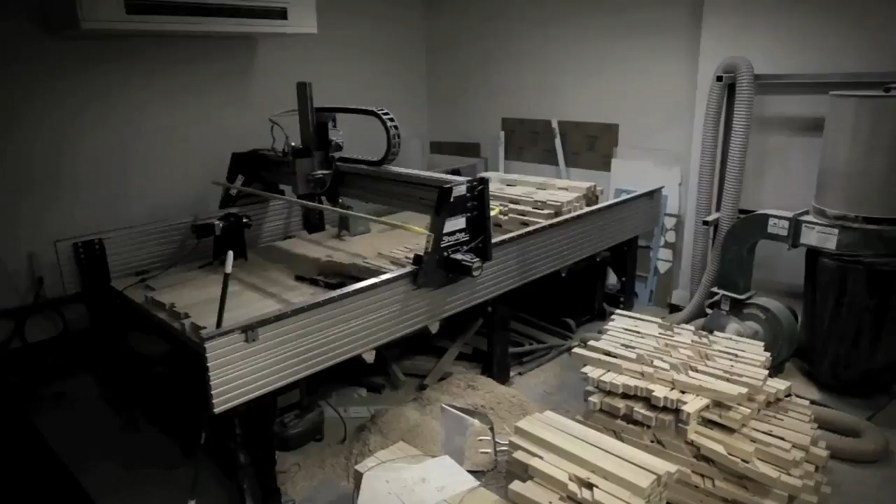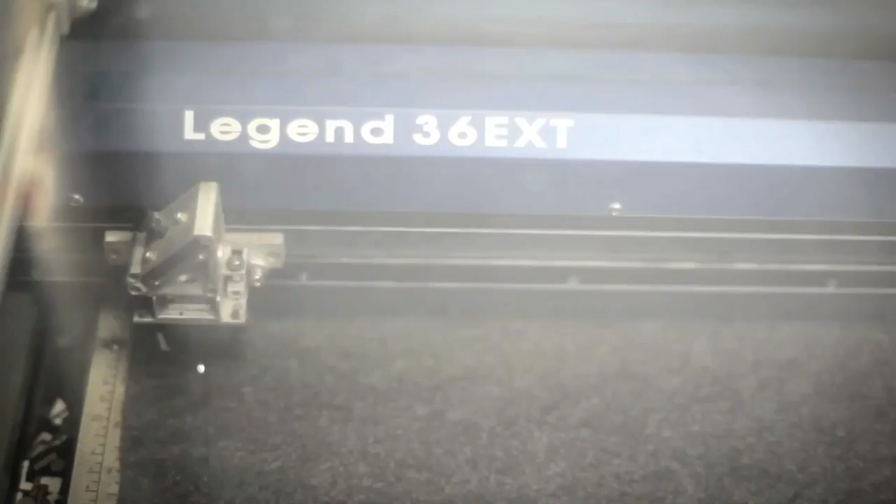Well, MIT is a very different kind of institute. Instead of becoming the recipients of building industry culture, we can now change building industry by the kinds of experiments we're doing in school. MIT has a variety of departments that are so powerful that they have the potential of radicalizing what we do in design and in the architecture department.

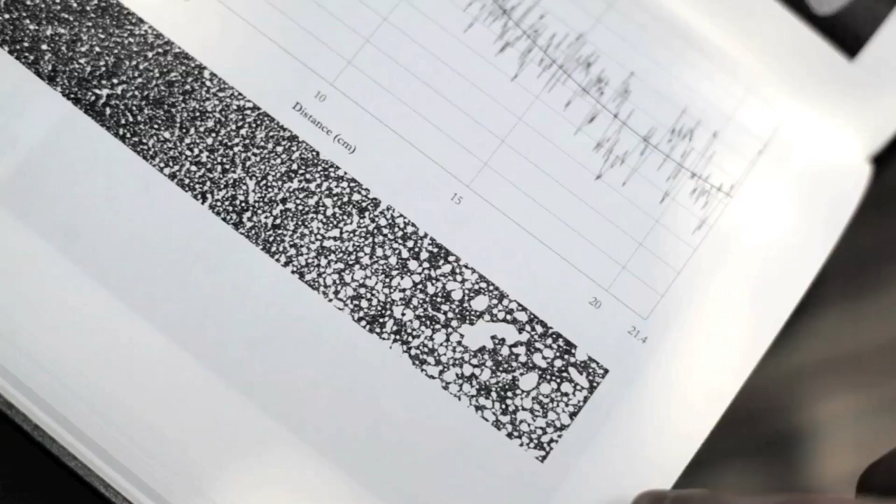Even the way that we've structured our curriculum around workshops and other kinds of collaborations in a way foster and encourage this kind of cross-disciplinary platform. So we're situated perfectly for the kinds of things that only MIT can do.

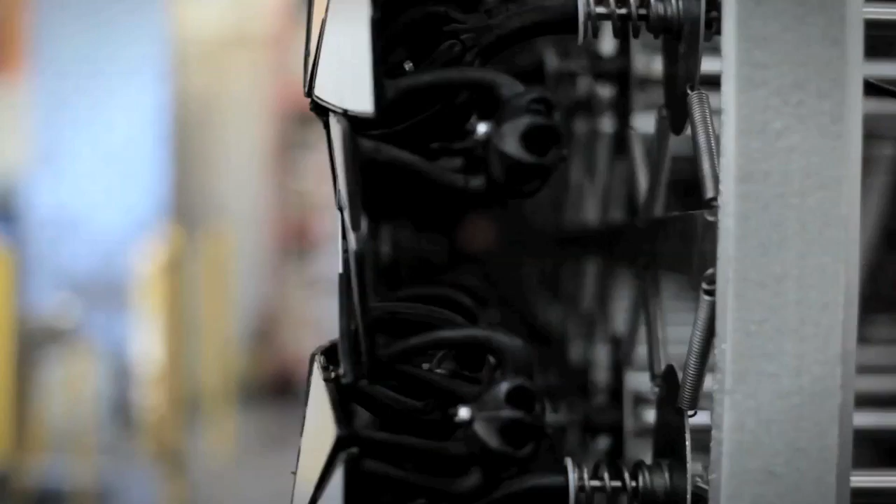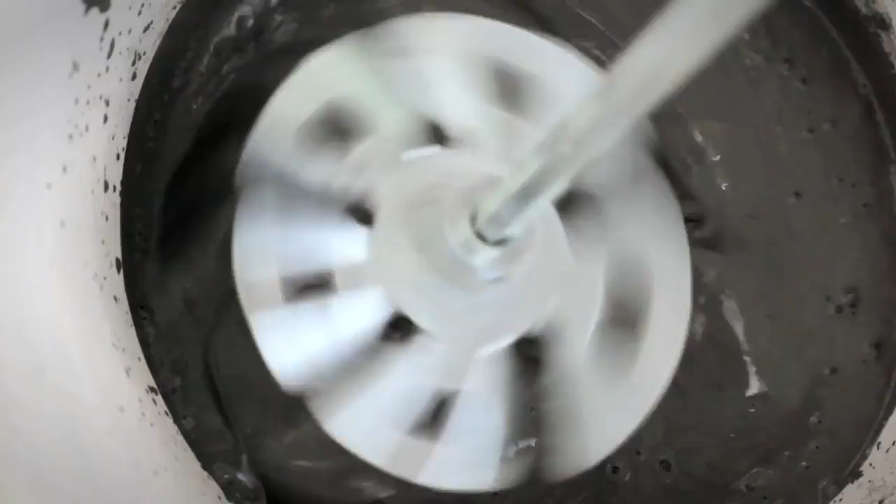The invention of human artifacts of any kind always consists of three elements: the geometry, the process, and the material that constitute that artifact. It's very clear that new materials engender new forms, and architectural design benefits from addressing, applying new materials in an informed way.

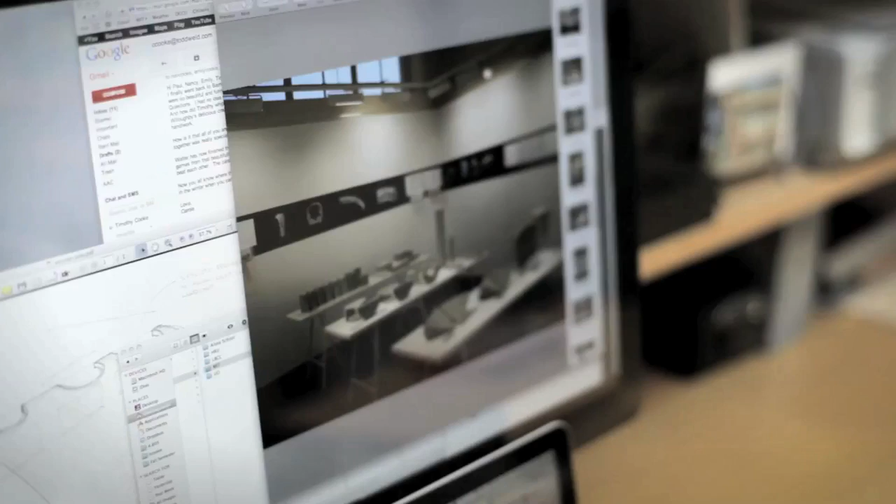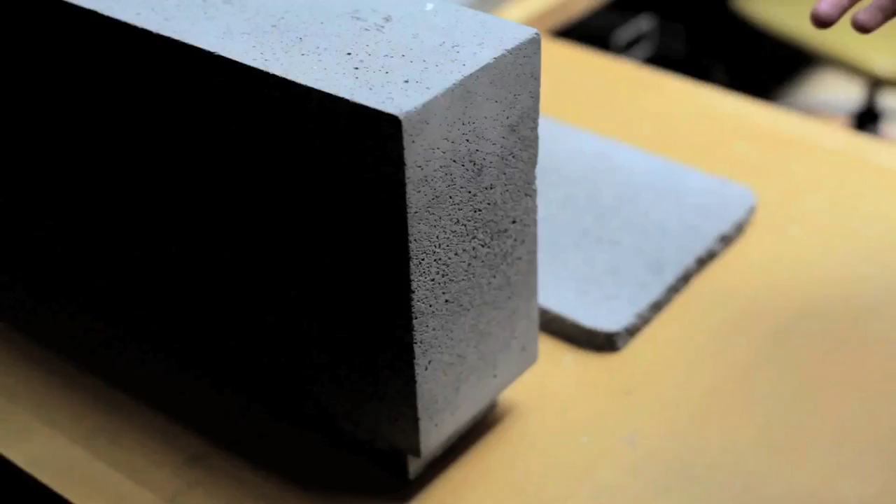The Emergent Materials Group and the Urban Metabolism Group share a central interest in materials for the built environment. Lately, we've been working a great deal in the area of foamed materials, especially foamed cements and concretes. So typically, beam in bending is going to have the greatest amount of stresses on the top and bottom, so we can reduce the amount of material on the interior of a beam.

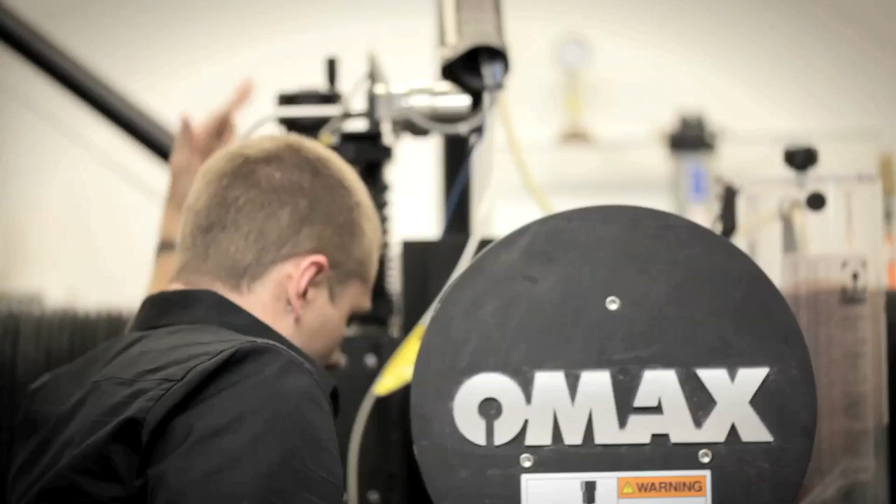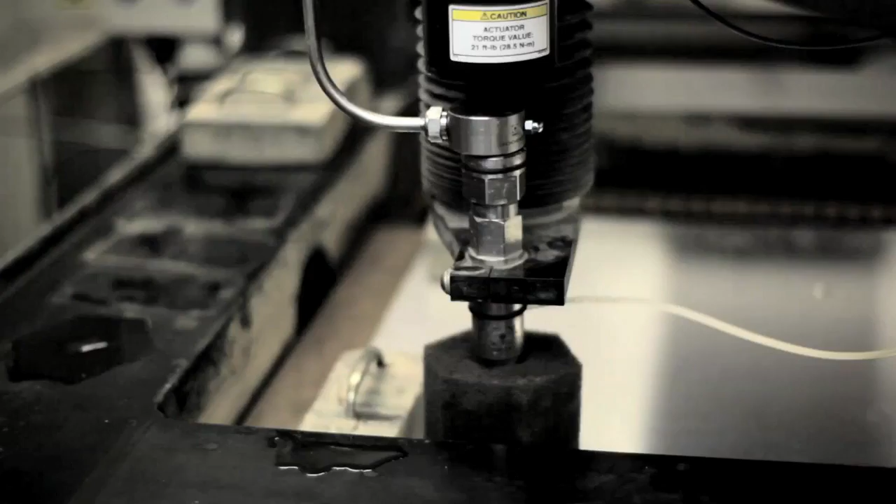The work really tries to address that there's two main paradigms throughout almost every industry. The one paradigm is what can you design, what can you compute or analyze, and the other paradigm is what can you physically construct or what can you build.

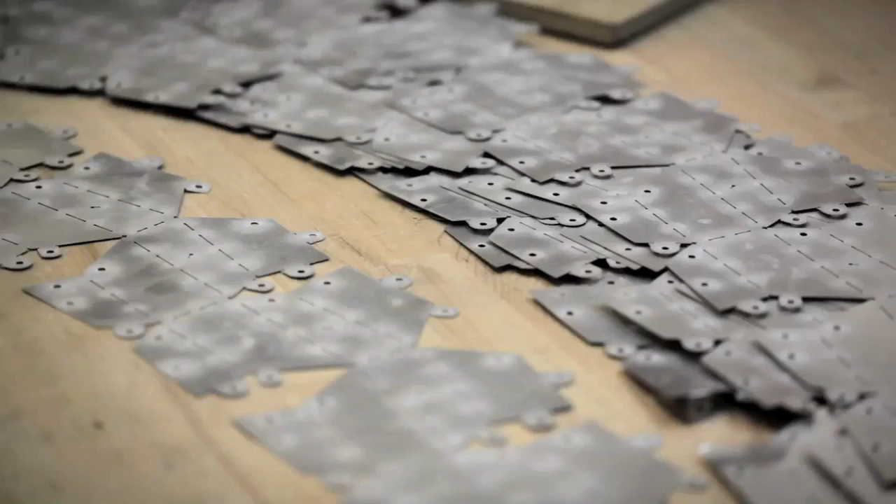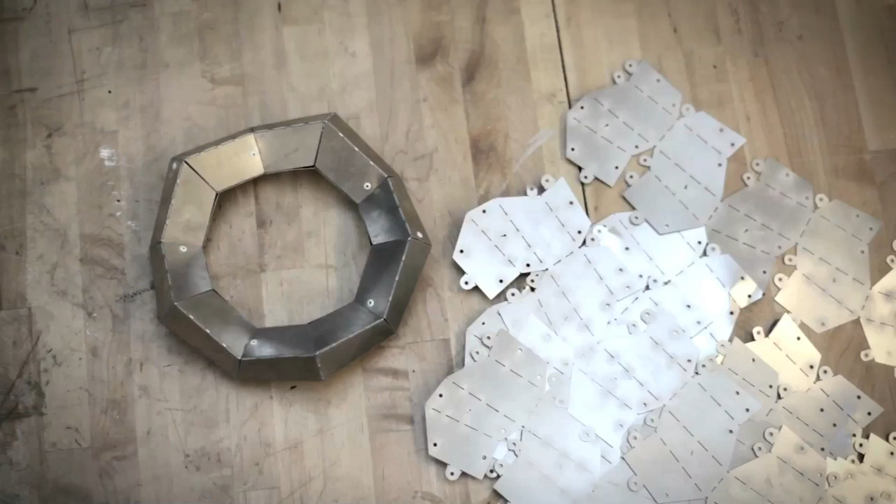The work really tries to traverse all scale lengths. It tries to work from the nanoscale, which is traditionally where we see self-assembly in biological examples, chemical examples, and it tries to bridge that and say, can't we use this phenomenon of self-assembly as a new paradigm for building things at large scale?

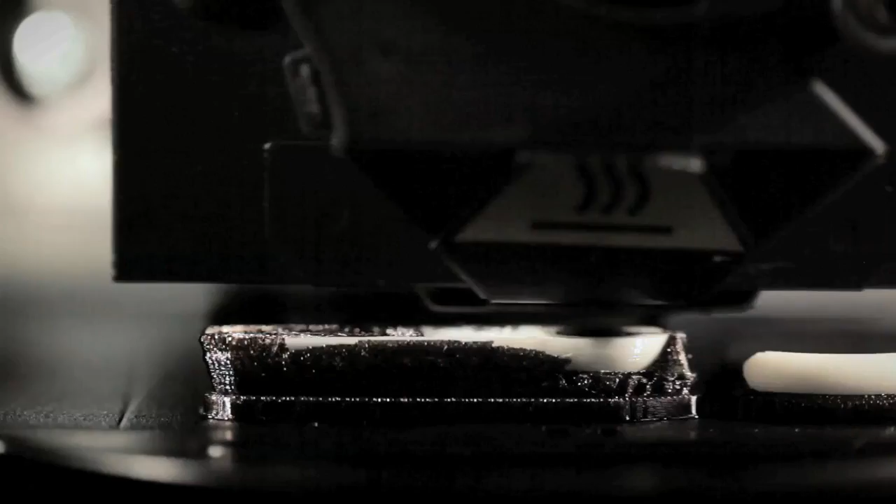We work with any type of material, synthetic or natural materials, and really try to design specific geometries that have materials in mind. And when you design those two together, they can respond to energy. And the energy sources can be heat, shaking, gravity, pneumatics, electronics. So you can use any type of energy. And when you mix that with the geometry and material properties, then they can respond and they can change state.

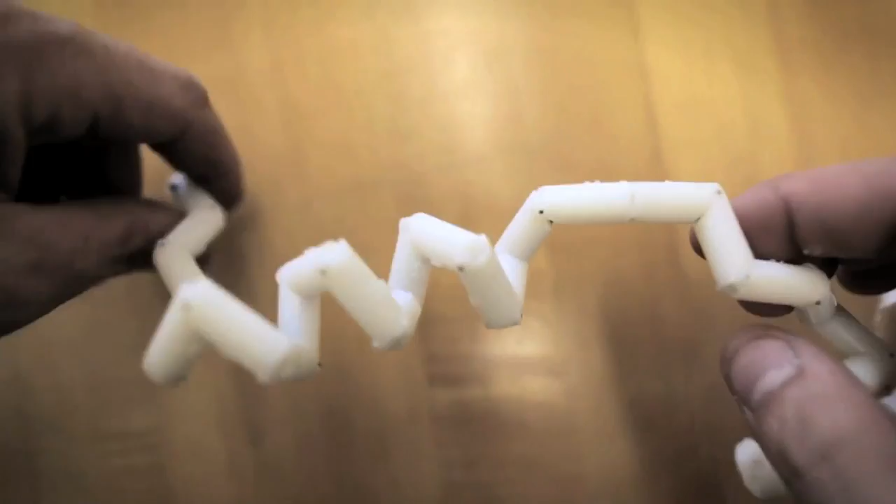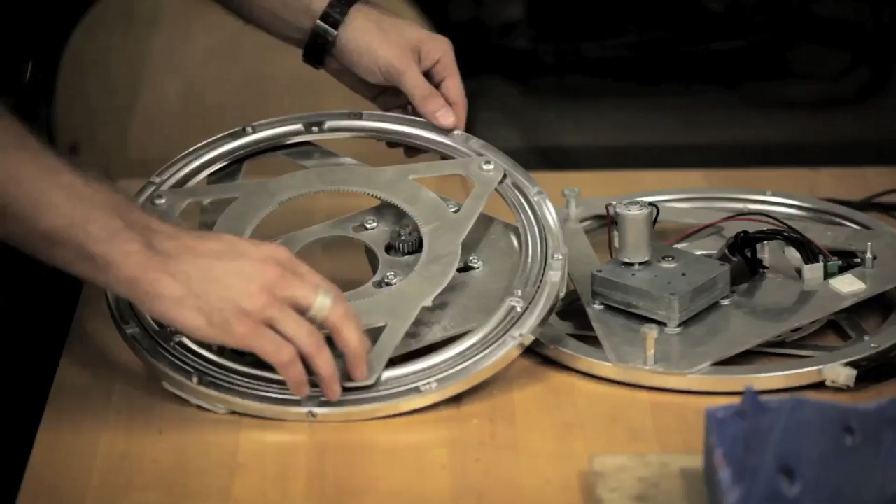Primarily, it will first be applied in extreme environments, scenarios where it's difficult to build. The research and the practice is really about cross-disciplinary collaborations between designers, scientists, engineers, working on this phenomenon of self-assembly, discovering where we find it naturally, where we can use it synthetically, and trying to apply that at all different scale lengths.

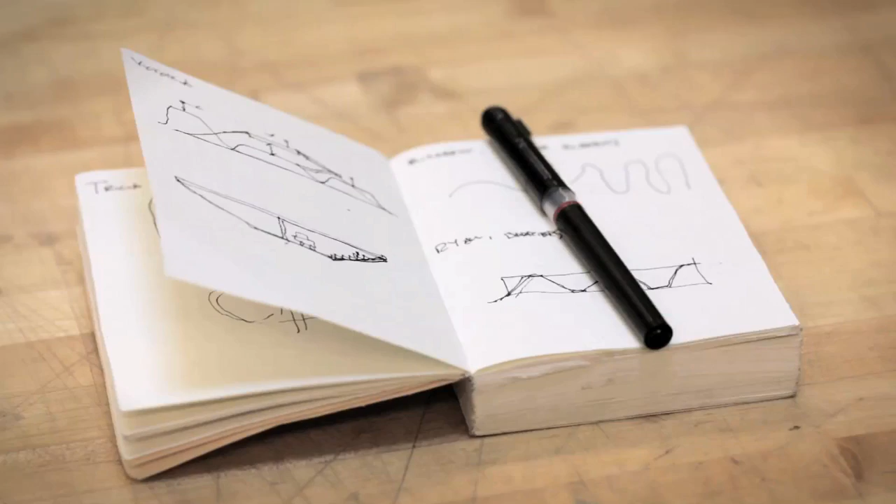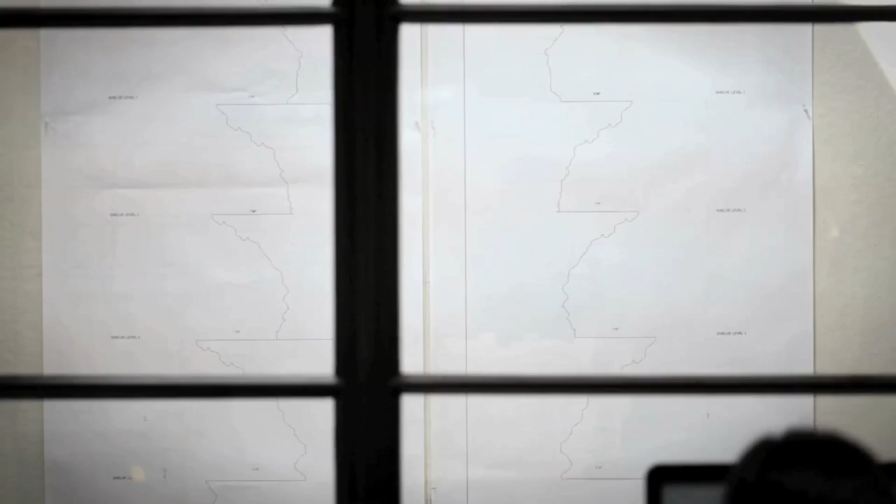The focus of our work, at least at this smaller scale, at the scale of, say, art installations or retail, we leverage CNC fabrication methods, but not as a way to exude their prowess necessarily, but more as a way to help us get at a particular formal agenda. An installation called Totems, which in a way is a kind of proto-architecture, not quite architectural, not quite sculptural, but I think that it offers a kind of proposition to each of those disciplines.

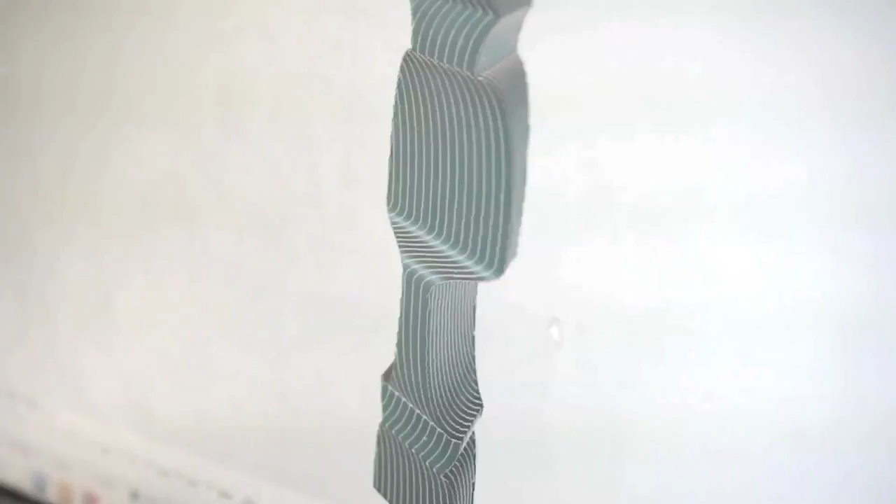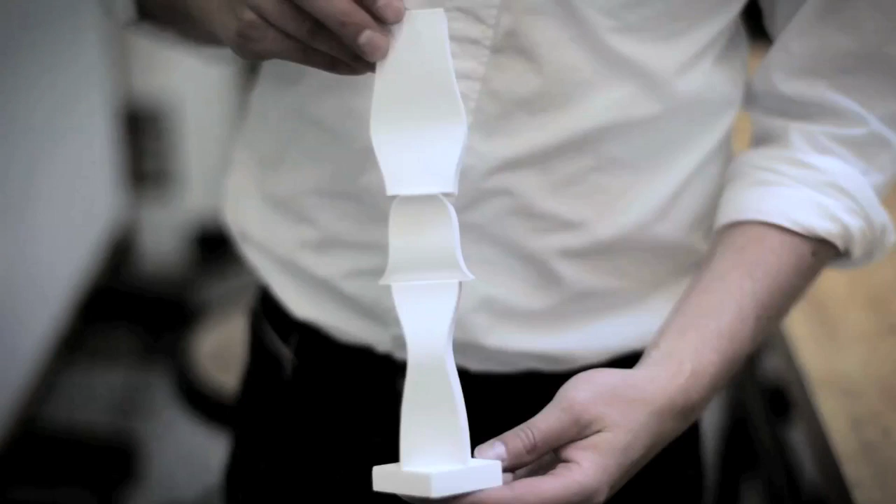We do a lot of testing via 3D prints. A lot of the formal investigations for Totems specifically happened in 3D prints. We did maybe 30 to 50 3D prints of the totems as a way to understand how the light and shadows were working and how best the anamorphic effects were working before we went to the large format wire cutter.

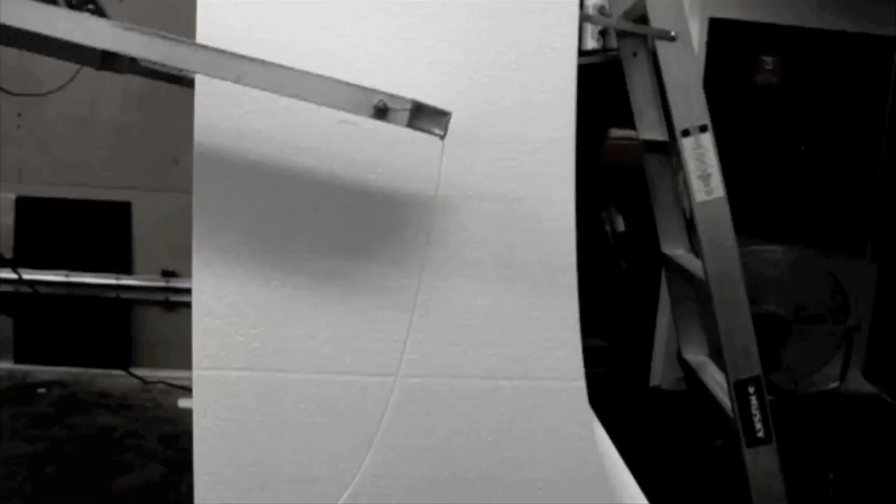In terms of collaborations, some of those happen here at MIT. Joel Lemire and I are developing an installation now, which is an anechoic chamber, and the anechoic chamber uses industrial felt both on its exterior and as a way to absorb sound on the interior. I'm bringing a kind of disciplinary or formal or geometric interest on the one hand, also a certain set of specialized understandings of the behavior of these sheet materials on the other.

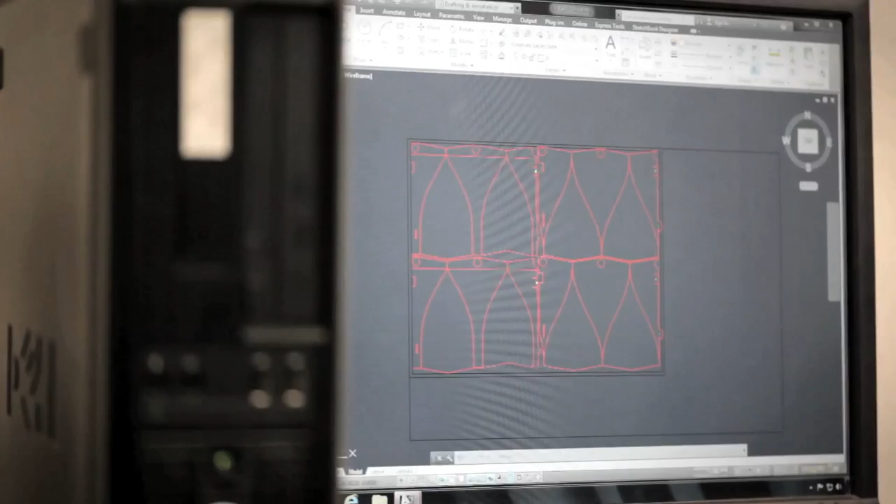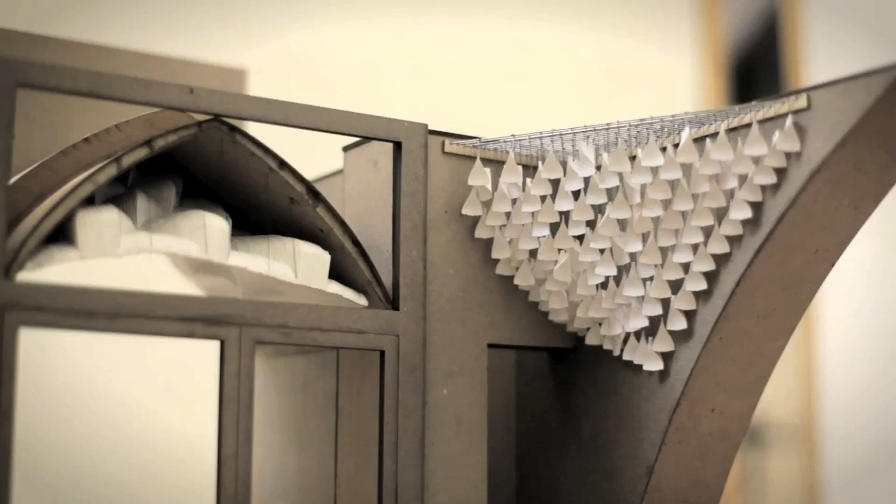So my architectural interests are really broad, but in terms of my current research preoccupation, it's about material geometry, specifically sheet shapes or sheet material geometries, how they bend, stretch, stack, fold. But obviously understanding sheet materials is really critical to architecture. It's a sort of a long-standing discourse on sheet materials in architecture, in part because it's so ubiquitous in conventional construction.

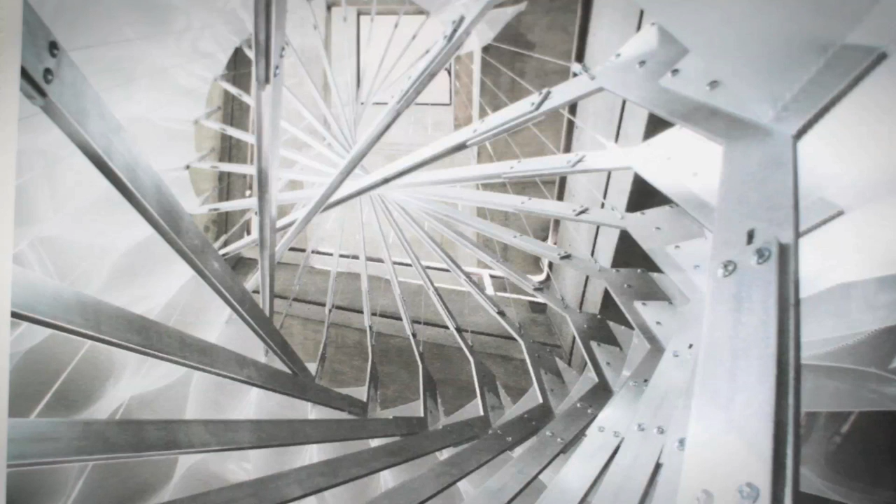So everything including plywood, sheet metal, steel, aluminum, plastics, all of these have to deal with the developable surface geometries, which is to say sheet shapes generally. And so expanding the total set of understandings about sheet shapes is a totally and kind of obviously worthwhile architectural undertaking. These installations attempt to jump from the scale of the paper model to the scale of the architectural space at the very least.

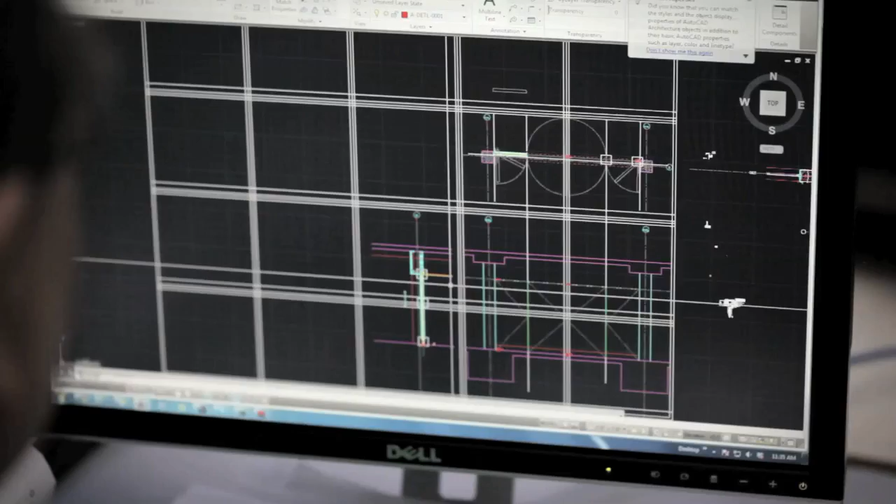Well, over the past 20 years, first as Office DA, now as NADAAA, we've identified 2 or 3 areas of focus. The first has been to look at materials and their behavior as a point of departure for many of the architectural experiments we do.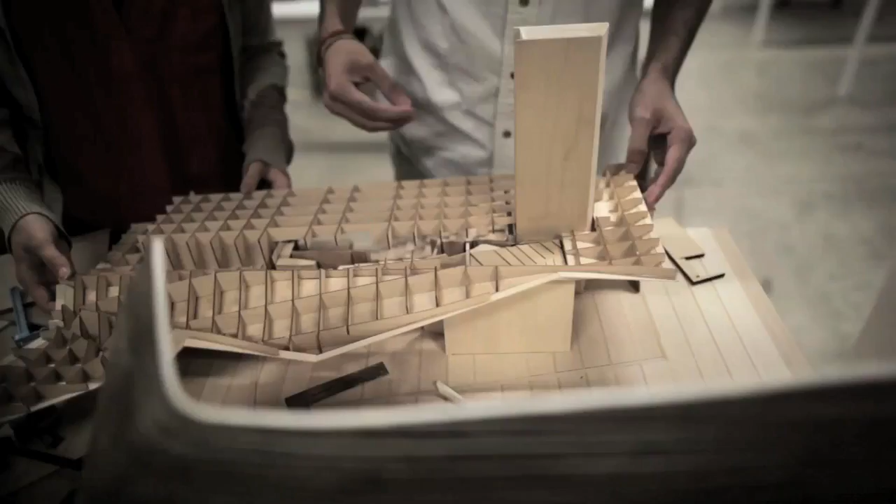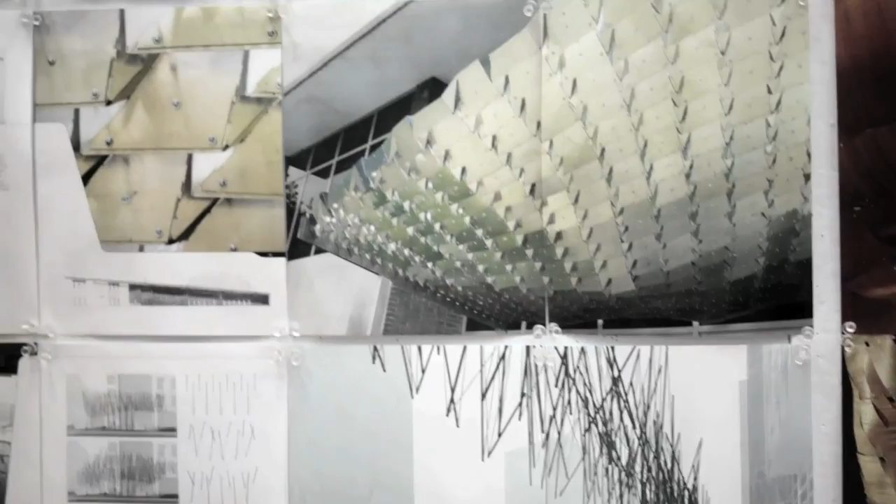The second area is to recognize that materials don't have an endless limit. Everything comes in modules, in sheets, in blocks, in bricks, and that without aggregation, there's no way of beginning to figure out how construction works in general. So the detail of bringing things together as a point of departure has been another central focus.

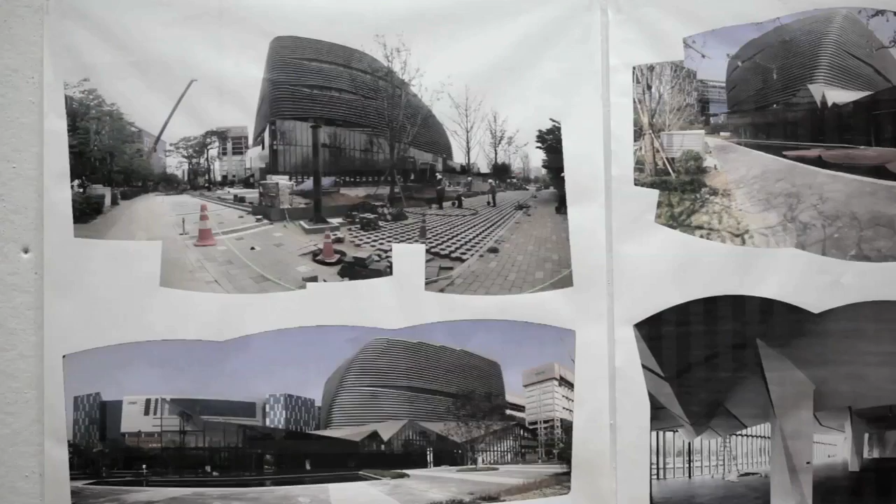So this has been a kind of point of revolution for a range of projects that we've researched and undertaken, some of which are at the scale of a piece of furniture, others that are at the scale of a building, and others that are really at the scale of urbanism.

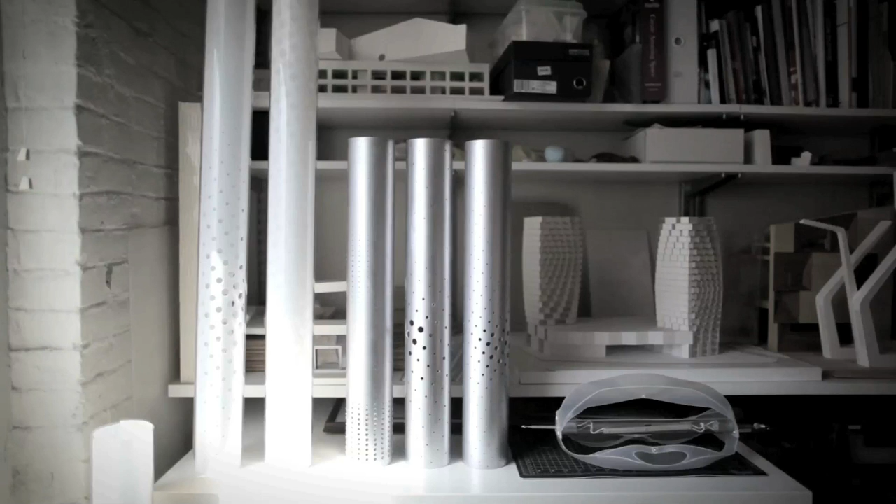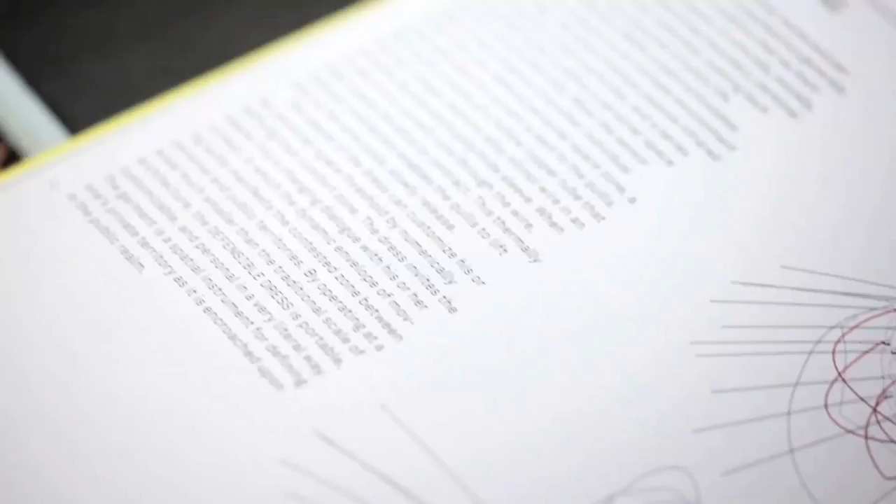One of the agendas of the studio is to create interactive architectures for public space through design and technology. And these projects can range in scale from the scale of the body, such as the Defensible Dress Project, which is a wearable architecture, which uses a microcontroller and shape memory alloys to defend your personal space,

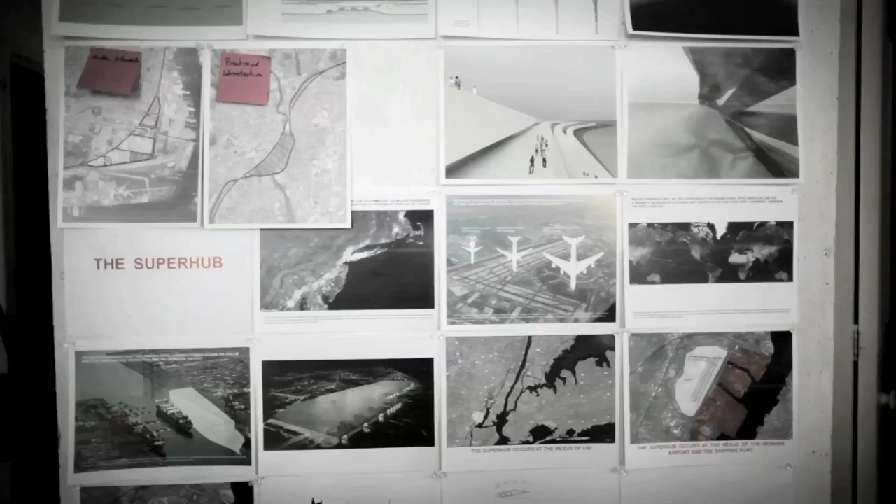to very public scale infrastructural projects, such as our proposal for the Audi Urban Futures Initiative, where we're speculating on high-speed regional infrastructure and transformations in the city around issues of mobility for the year 2030.

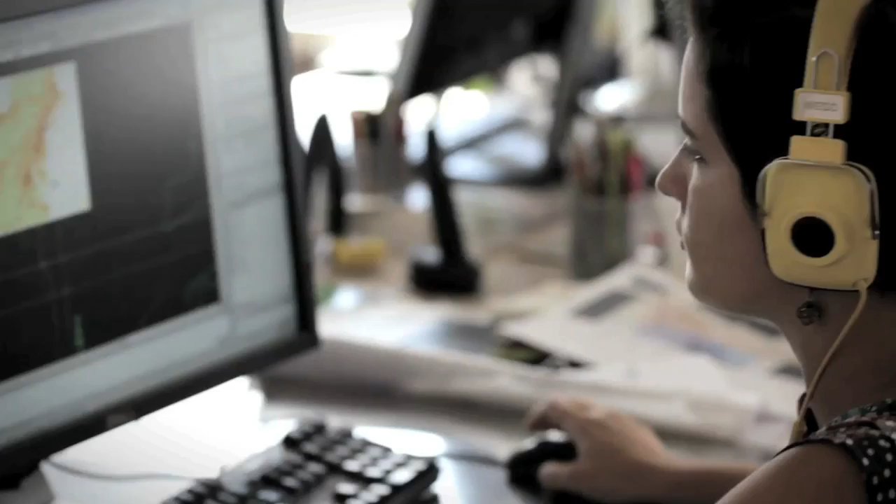It seems now more and more necessary that our environments have to become smarter, more responsive, and more flexible. The way in which architecture is made needs to be completely rethought if we're to go beyond bricks and mortar to engage the challenges of the next century.

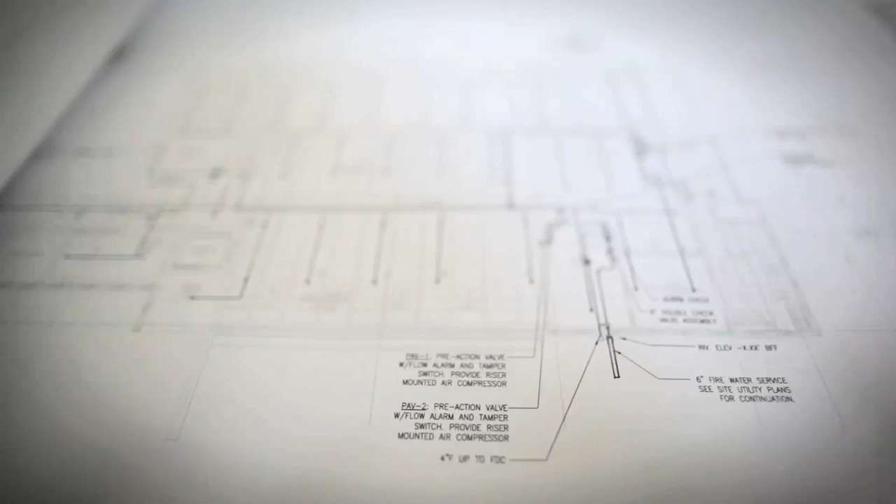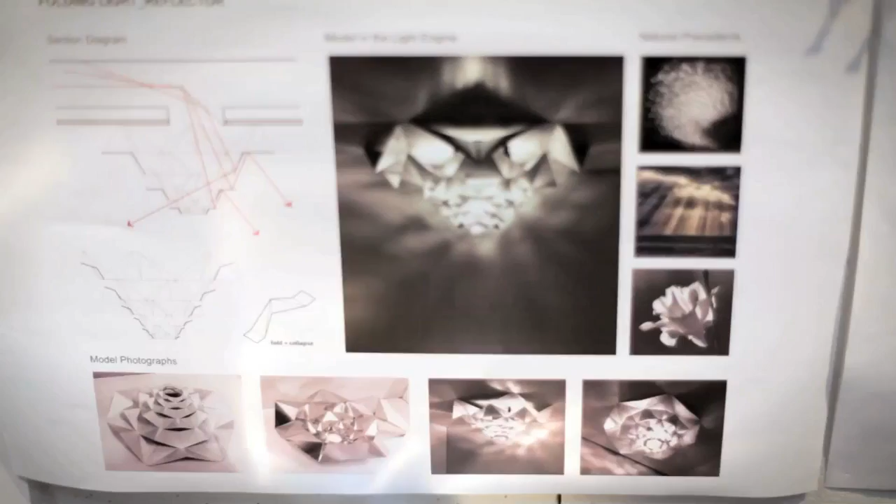My work as an architect focuses on designing architecture and urban scale interventions that engage the emergent infrastructure of our time. We're interested in how design engages that mutability between energy and matter, when materials generate energy or store it, when materials are dynamic and change state, exchange heat, produce light, or communicate information.

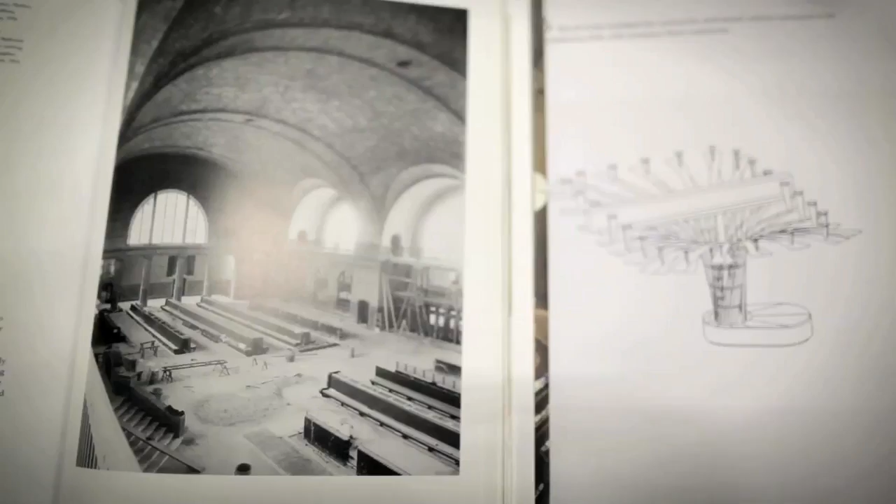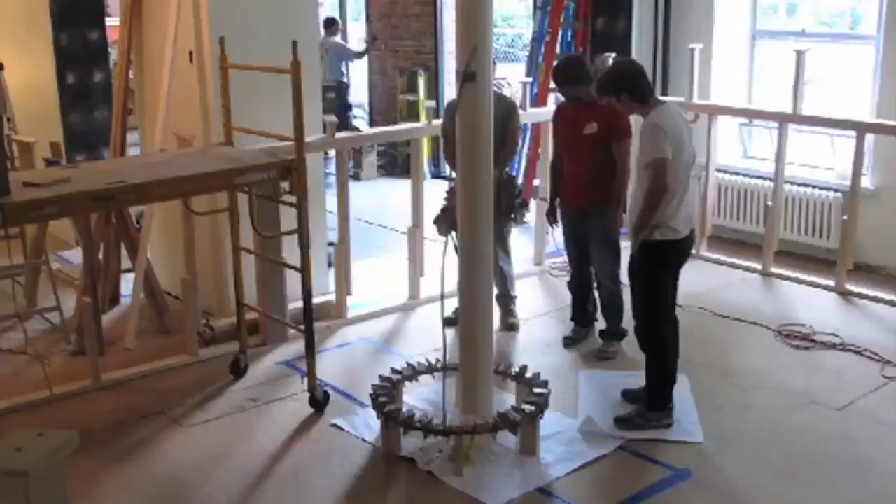The challenge, I think, for the discipline of architecture today isn't in digital fabrication, it's in material fabrication, in thinking about what it means to be material today when we move fluidly between digital and physical realms, how we use materials and not waste them, and how we form materials and how we transport them.

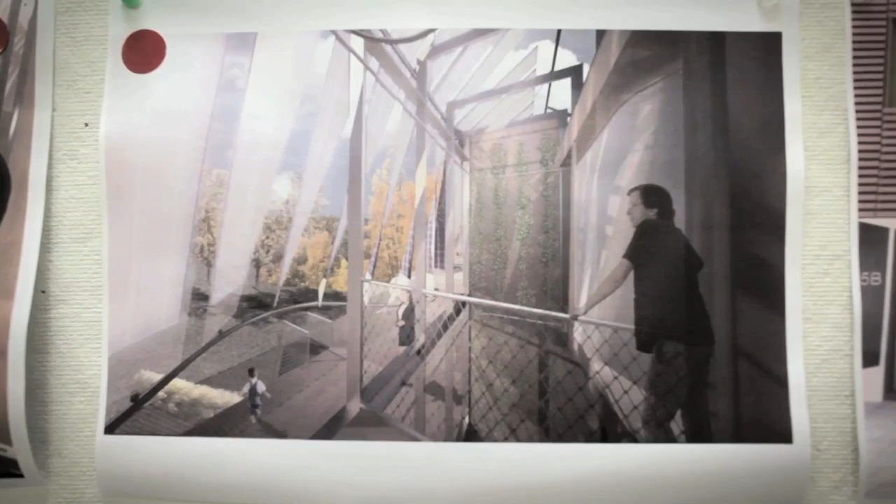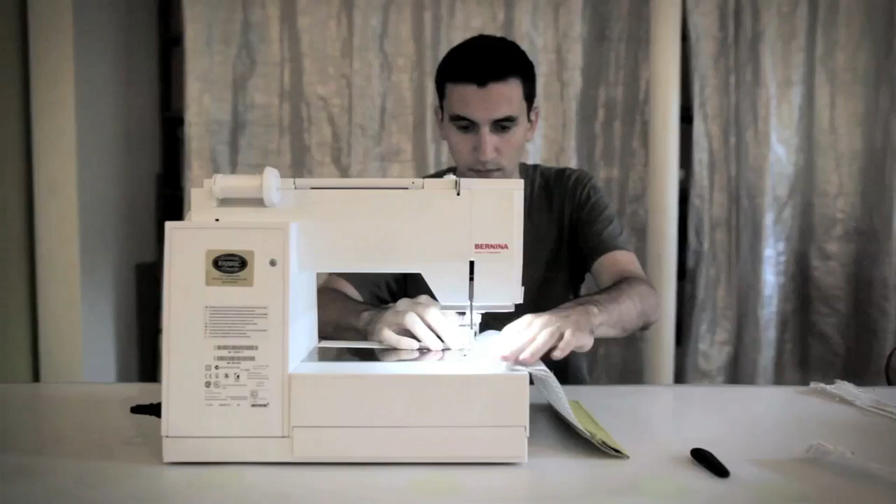If we're going to change the building industry and regenerate an innovation-based manufacturing segment in the United States, then I think we need to do this from within practice, from working with the norms of the building industry, but not settling for those norms, instead innovating to both accept and transform those standard conditions.

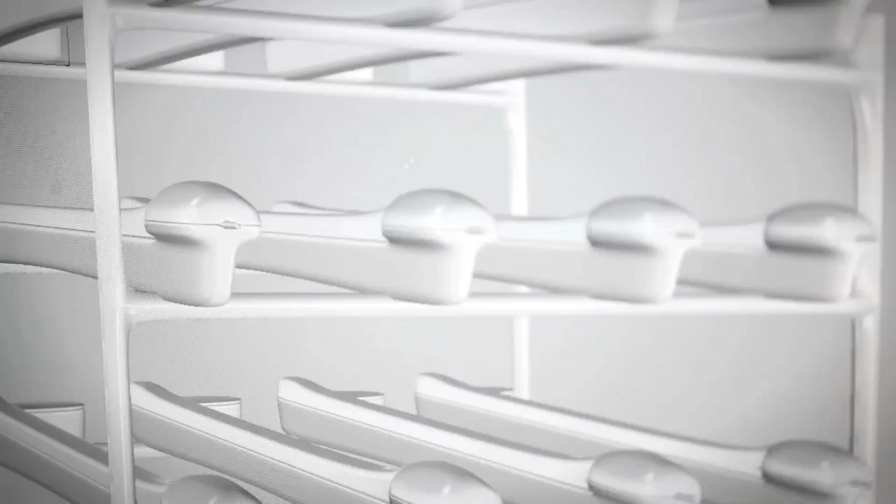I think we're pursuing several initiatives relating with computational material at several different areas. Dynamic interactivity is one with Hyposurface, and we're driving that forward. Imagining actively alloplastic environments. If you like, it's a demonstration of the power of computation come real time.

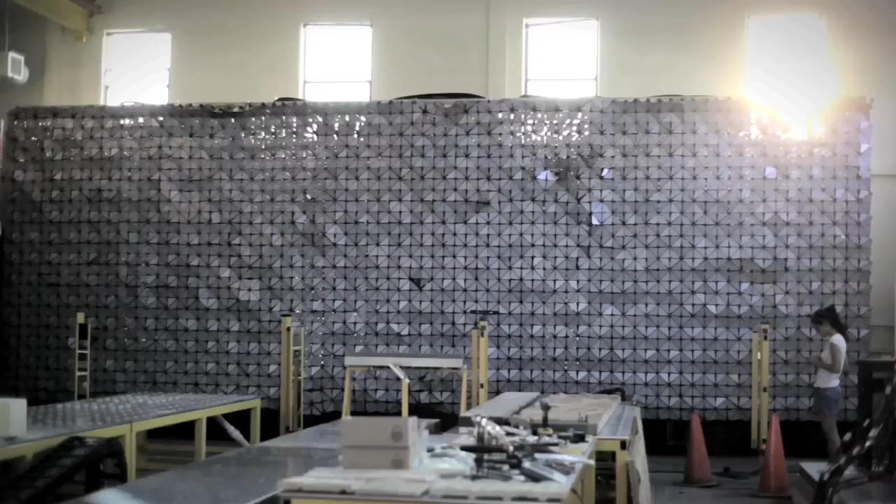Then in the robotic manufacturing work, we're looking for sort of power, information and material all coming together, but with control directly at the architect's workplace. So we're developing tools that allow architects within their native software like Rhino to pilot a powerful production machine like a KUKA robot,

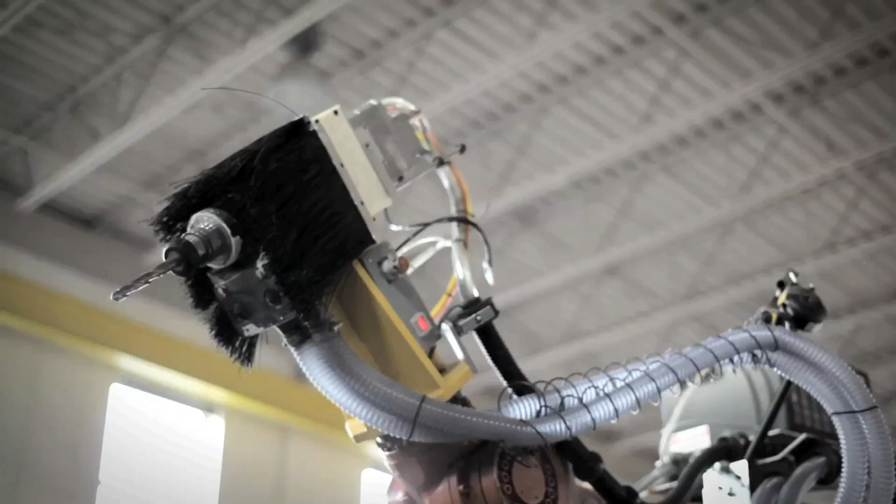demonstrating, I think, what will be the future of manufacturing, which is sophisticated algorithms and modeling that link directly to sophisticated manufacturing machines and allow both new efficiencies but new versatilities, new formal complexities.

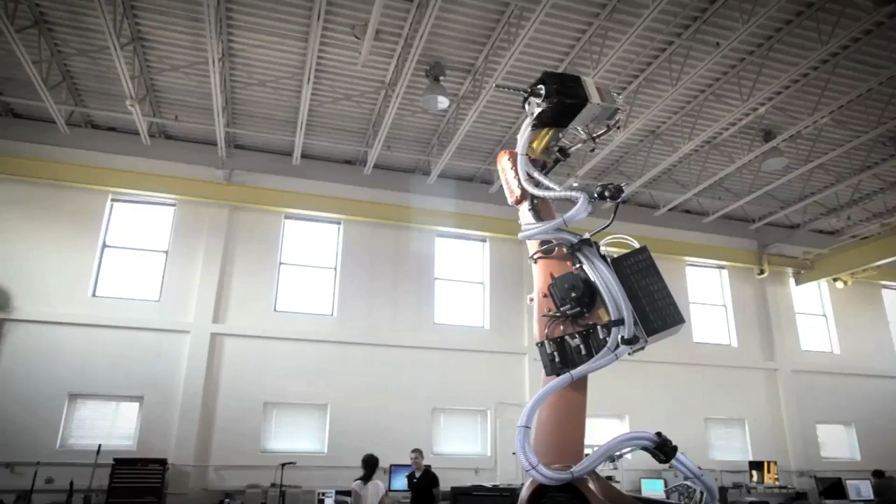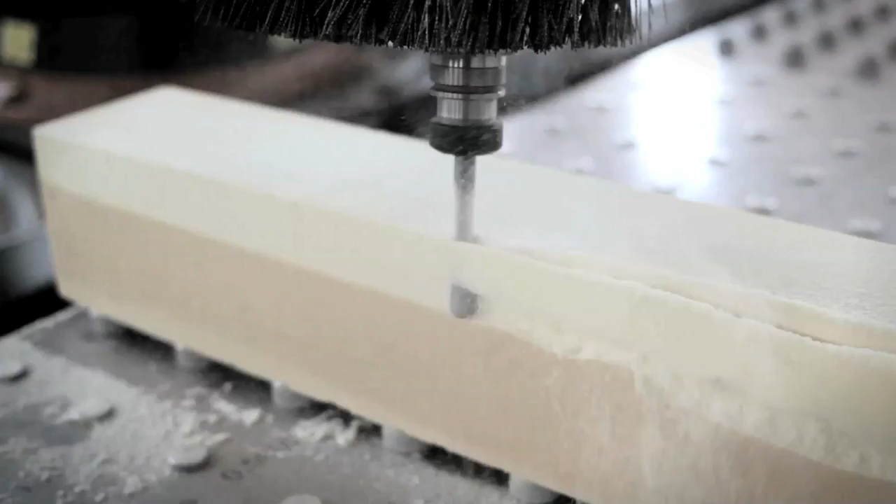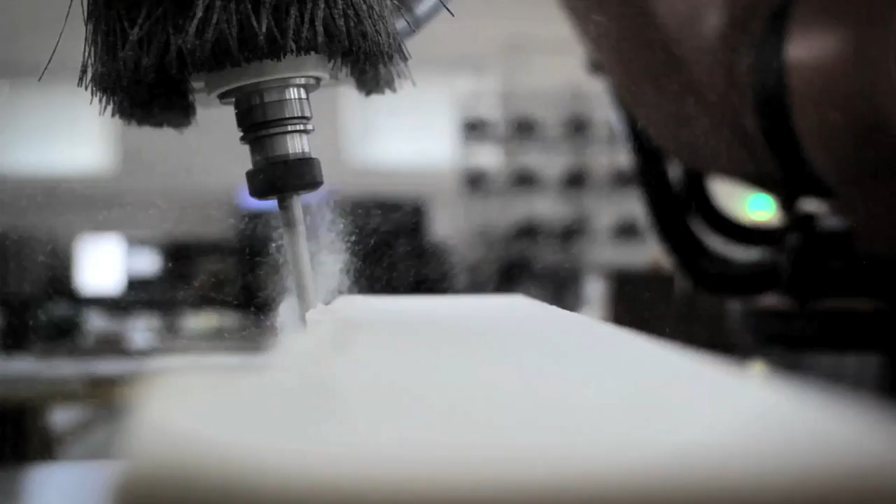I'm also frustrated by the slowness of the building industry to innovate materially. There's a fantastic amount of research in material science that's pent up and is just dying to come at a period where the sort of environmental concerns are becoming so enormous, and the challenge of building the developing world is so extraordinary that they're necessary.

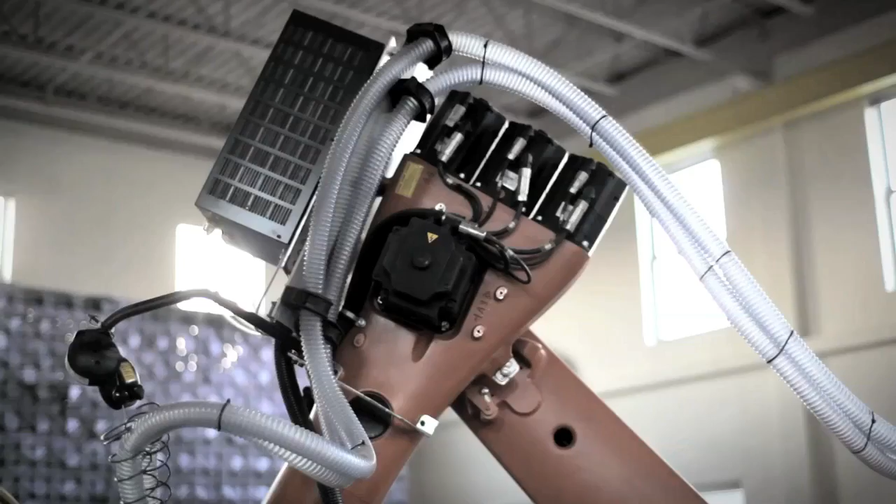CAD/CAM meets material science like composites, I think, is going to breathe a whole new life into the architectural and building industries. So